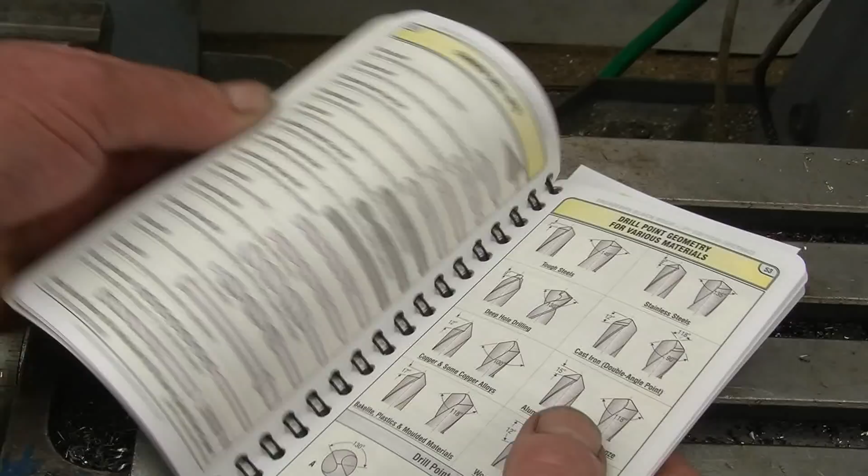There's been some progress on my dad. He's out of hospital now. He's in a care centre with other people of a similar sort of age with similar sort of disabilities, and he seems to be doing alright. It's getting to the stage where he can't really walk, so he's sort of transitioning into a wheelchair, and he's going to need to go into a different accommodation to his bungalow, unfortunately. But he's alright. I keep mentioning all the people that send well wishes in. He thinks it's absolutely fantastic, and once again I must thank everybody who's sent their well wishes towards my dad. It really is much appreciated.

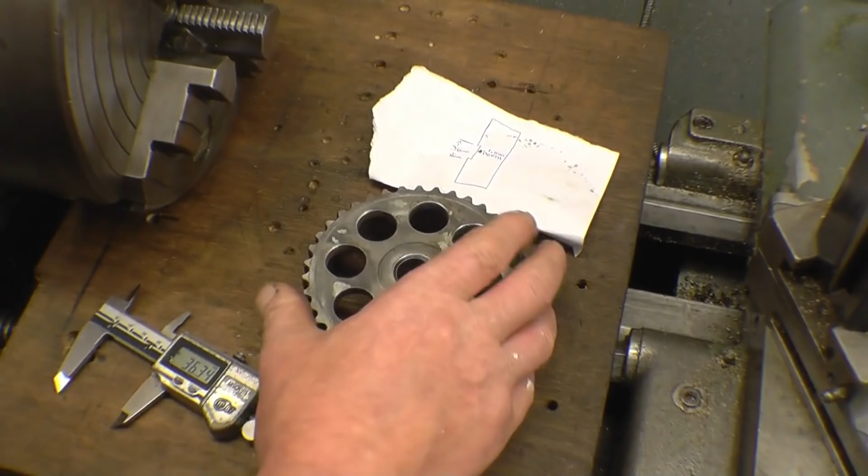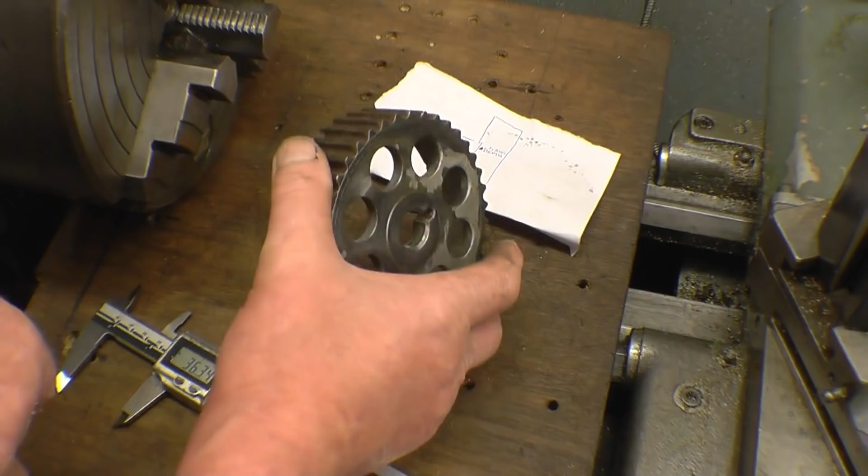I've got an automotive type job here. This is a jack shaft pulley or an auxiliary drive shaft pulley of a Volvo race engine, or at least it's going to be. I've got it modified, then it's going to go and get vapor blasted and coated. It's a much wider pulley than the standard one, and they run a wider cam belt. Obviously a wider cam belt's a lot stronger than a narrower cam belt.

Anyway, what I've got to do is machine a recess in here 1.5mm deep with an OD of 36. Now that on there is already basically at 36. Come on, John.

It is just about on 36, so we'll be machining that off. 36mm recess, 1.5mm deep. That's quite a lot of meat on the pulley. The lad assures me it'll be alright, so all I want to do is machine it.

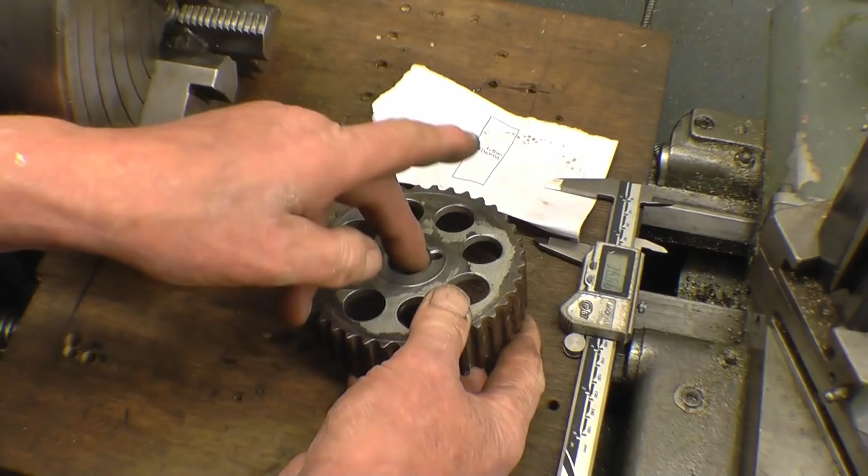I've cleaned it up on a wire wheel just to get a face there I can run a clock on, and that face there we're going to go flat against the chuck. I'll use a 4-jaw chuck. Put a centre in here and line the centre up just to make sure it's running concentric, nice and true.

I'm going to use this little centre just to initially line it up. Basically hold it square against the chuck, wind that into there, and that'll sort of hold it in the centre while I get a nip on the chuck. Obviously I'm going to have to put some packing pieces in. I don't want to damage the lad's gear.

So we'll put a little nip on each one just to hold it. Not a million miles away. We'll put a clock gauge on and see exactly where it is running. Check on this face first.

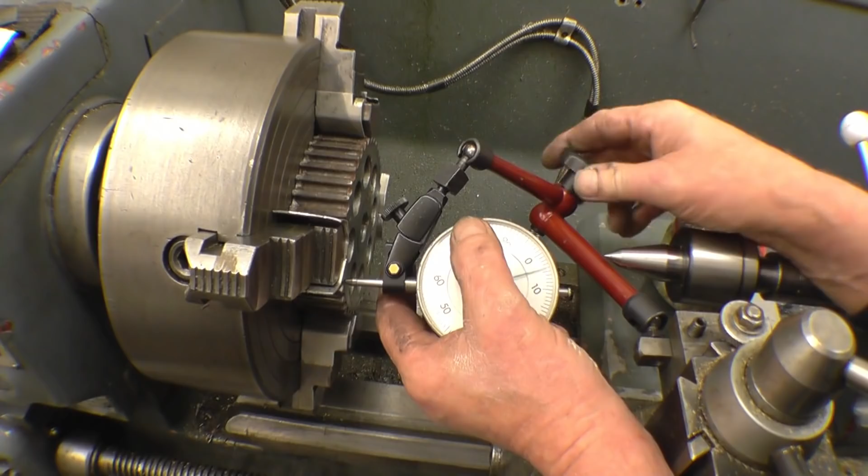And that's within a couple of thou. Obviously there's some corrosion on there which it's picking up on, but that's basically running true. Now we need to make sure it is running concentric.

Concentric's not a bad word for me for a Thursday night.

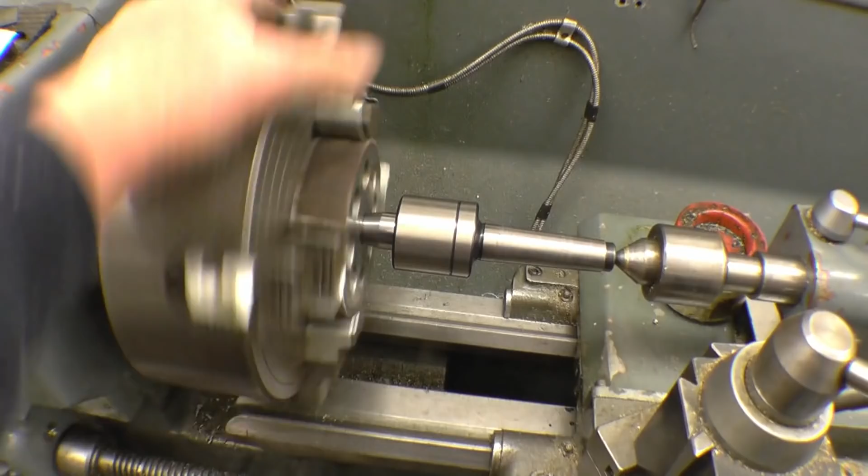Just use the centre as a... and you can put a clock gauge on there and dial that in, and that means it's going to be running nice and true. It's not far away.

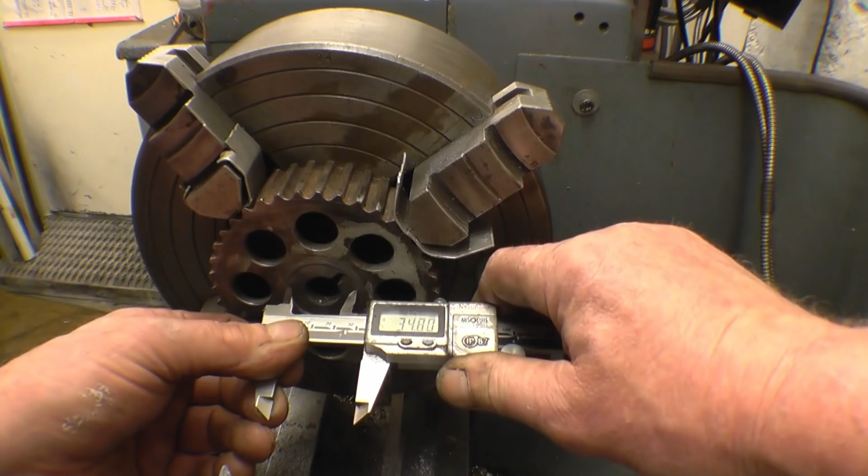It actually locates on the centre part of the shaft. This is just to get it further in so the belt run lines up. So it's not a critical fit on the shaft. 34.8. So we need to come out 1.2.

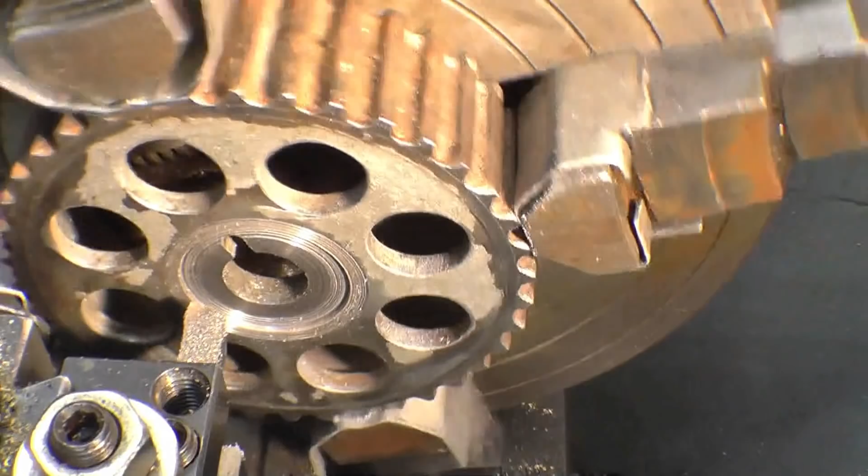I'm going to find a tool with a much squarer point on so I can get into there a lot better than that. Right, we're on 36 there, slightly over, that will do for John. Zero the DRO at that. We need 1.5 and we've got 1.04, so we need a little bit more.

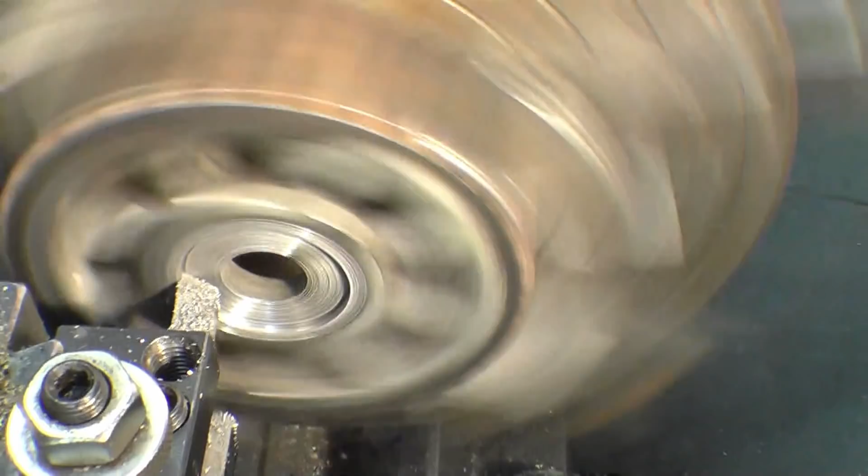Not the best finish in the world on there. Speed things up a little bit. I've still got a fraction to play with. That's better.

I'm just going to break that edge. I need to put a countersink in there. I'll do that first. I'm going to clean this up with a little emery tape. If you aren't confident in doing this, don't do it. Go and poke your finger in the hole. That's better.